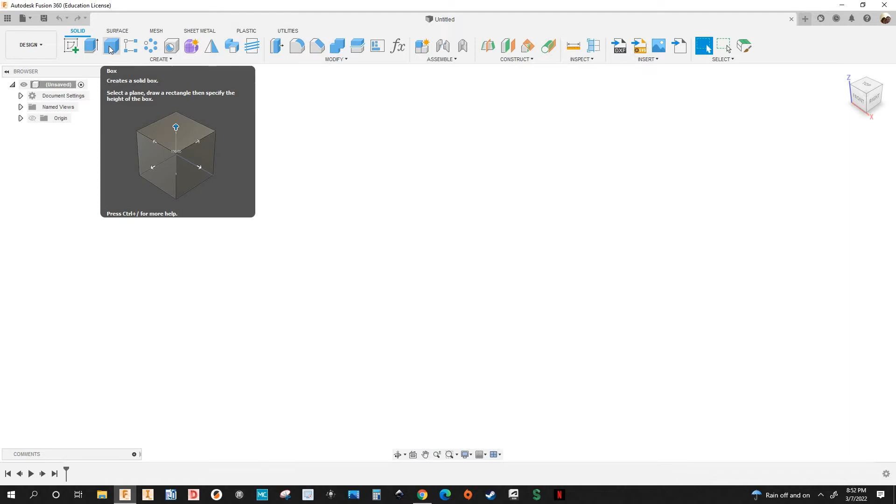I'm just gonna select the box up here. But before that, let me change the units from inches to millimeters.

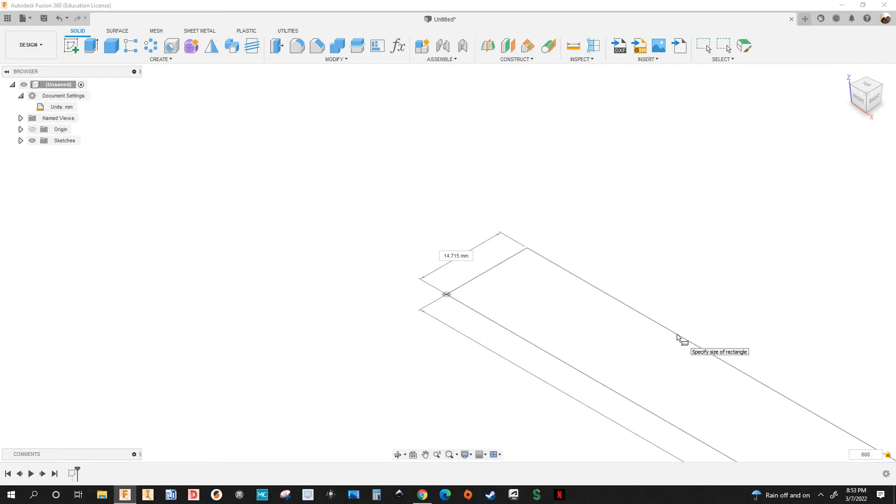Now I'm gonna select this box icon here, and I'm gonna select this bottom plane. I'm gonna snap it right there. My size of the part is gonna be 600 millimeters by 250 millimeters, and I'm gonna hit enter. My thickness is gonna be 50 millimeters, and the operation is gonna be new component. I'm gonna click OK. Here's the size of the stock or the size of the panel.

Next, I'm gonna create 3 pockets: two on the outside, one in the middle. I'm also gonna create a groove right here in the center, on this face.

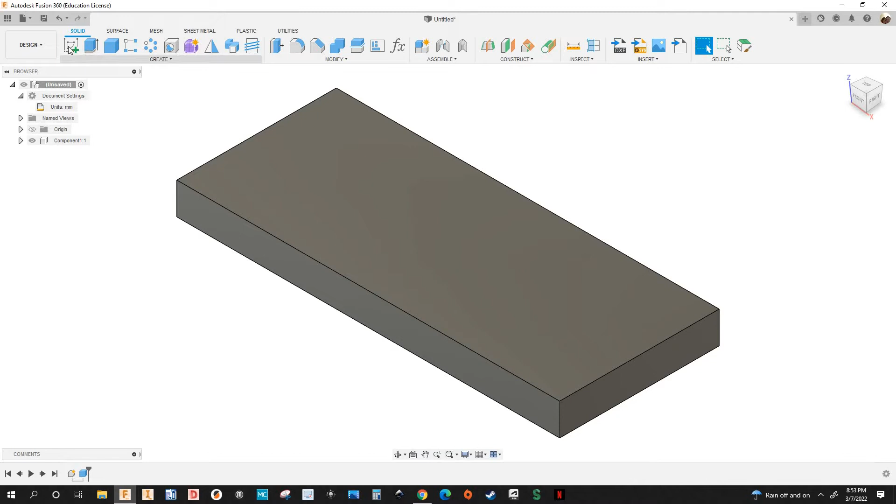So I'm gonna select create a new sketch, go up here, and select this face. Then I'm gonna select center rectangle right up here, and I'm gonna place it right there. Next, I'm gonna place this rectangle in the middle.

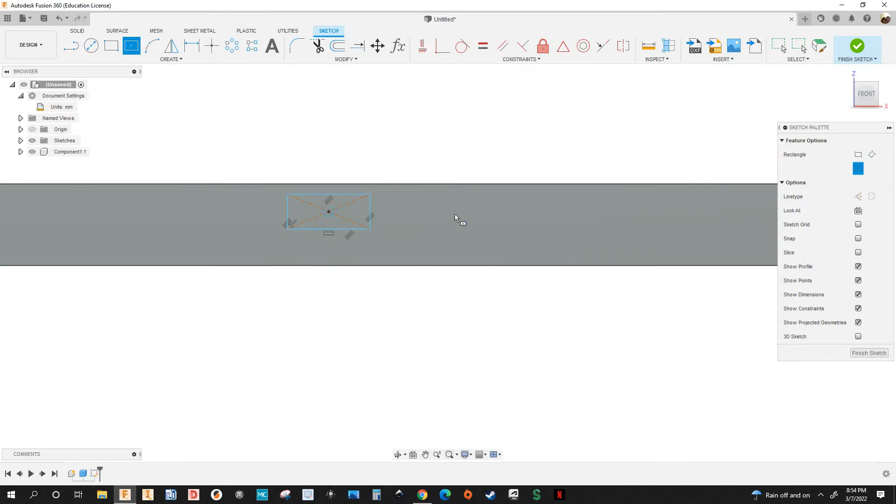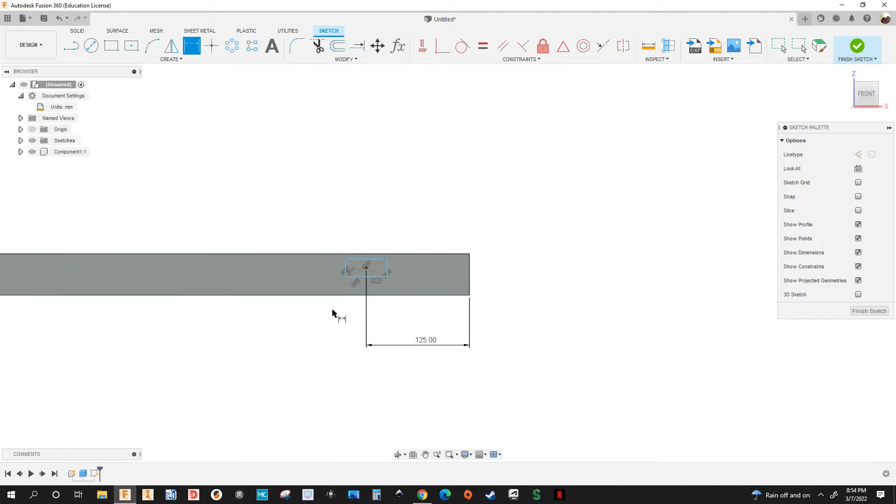I'm gonna go up here, sketch dimension, or I can hit D on my keyboard. I'm gonna select this point and this point there. I'm gonna type 250 divided by 2 because that's the depth of the part. Oh, sorry, the length of the part is 600. So I'm gonna type 600 divided by 2.

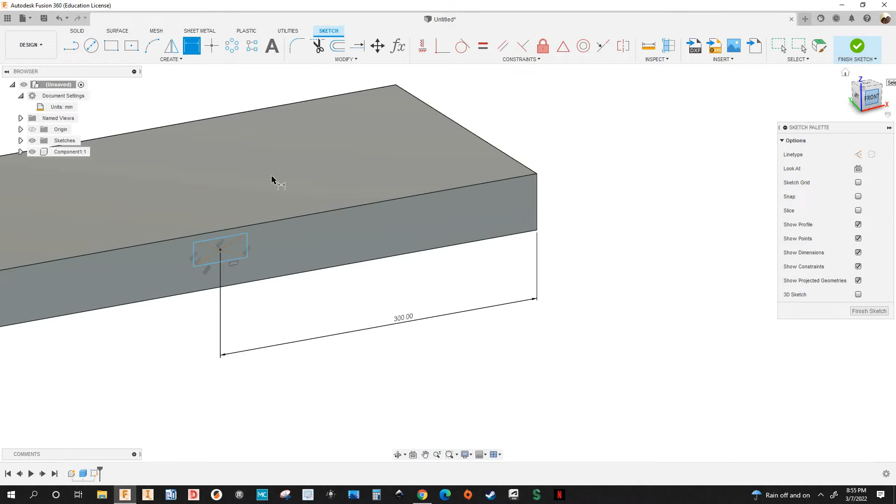That's the width of the part. Let me put it on front view. Next, I'm gonna select this point there with this point here, bring it out, and I'm gonna type 50 divided by 2. Hit enter. Now that rectangle is in the center, or the pocket.

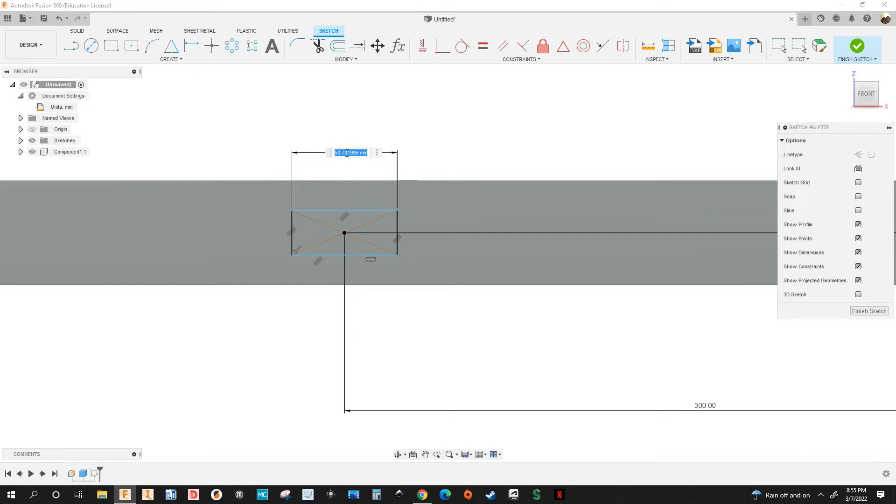So the size of this pocket is gonna be 70 millimeters by - select this line there by - let's make this 25. Hit enter. That's my first pocket right there, that rectangle.

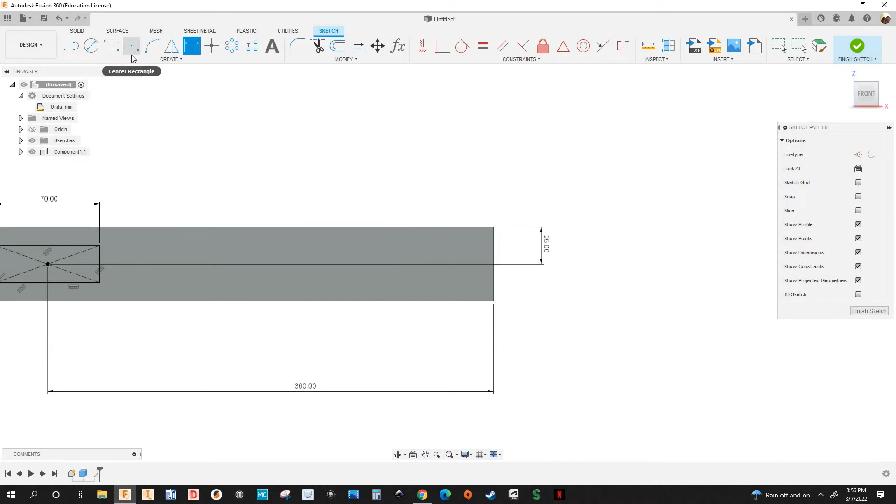Okay, so the next rectangle is going to be right here on the right side, or the next pocket. I'm going to go up here where it says center rectangle, place it right there, hit D for dimension, select that point there and this point here, and select this dimension there, that's D7. I'm going to hit enter. Right there is right in the center.

It's gonna be the same size as this one right here. So I'm gonna select this line there, bring it down, sorry, and I'm gonna select this dimension there, which is 70 millimeters, and that is D8. I'm gonna hit enter, and I'm gonna select this line there, and select this dimension, 25 millimeters, which is D9. I'm gonna hit enter.

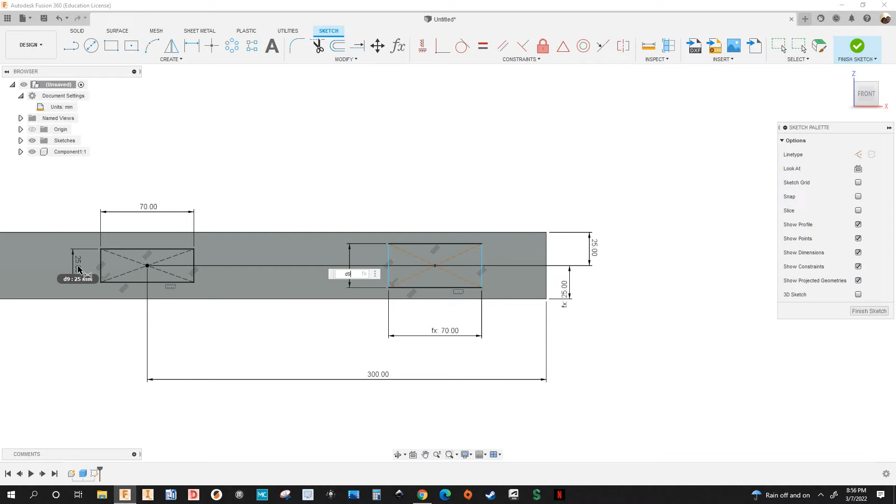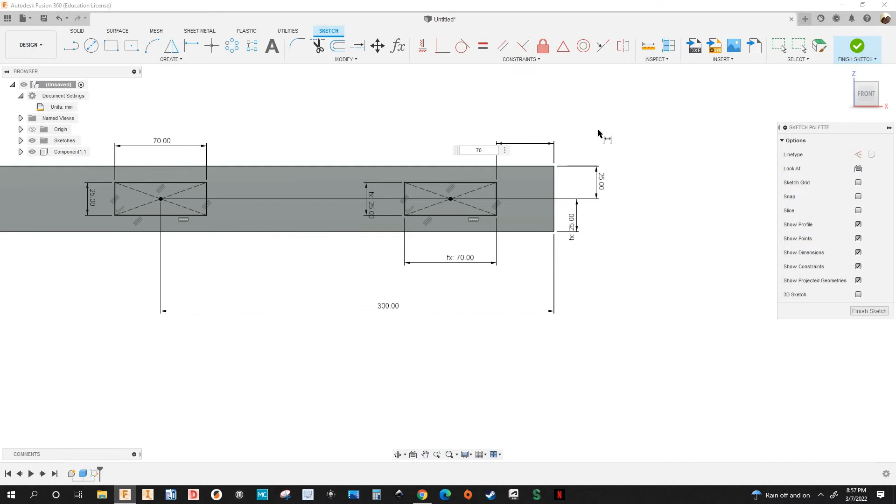And I need a distance right here from this edge of the pocket to the edge of the part right here. So let's make this - I'm gonna select that point and this point there - let's make this 70 millimeters. Hit enter.

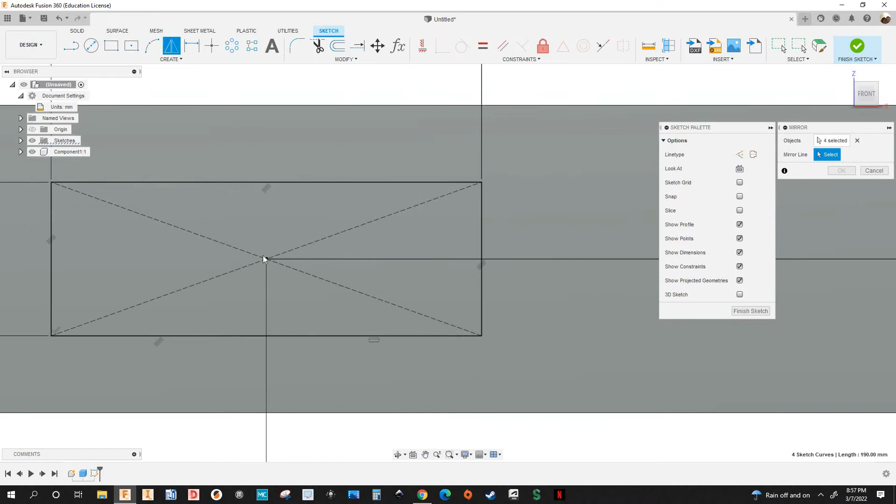Now I'm gonna mirror this rectangle to the other side. I'm gonna go up here where it says mirror, click on that guy, and I'm gonna select this line, this line, this line, this line. Those are the objects. And I'm gonna click on mirror line, and mirror line is gonna be - I thought I could select this midpoint there. So I'm gonna cancel.

I'm gonna create a line right here in the center. So I'm gonna hit L for line on my keyboard, or I can go up here, select that line, and I'll select that midpoint, or I can bring it down there and select that triangle right here. See the triangle as the midpoint.

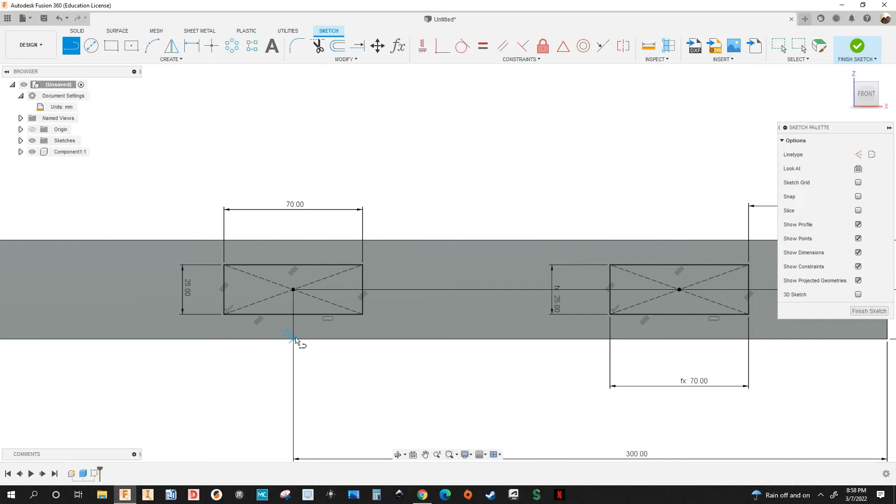Okay, but I'm not going to be able to see it because of this dimension, so I'm going to go up here, snap it right there, bring it up, hit enter. Now I'm going to mirror the rectangle to the other side.

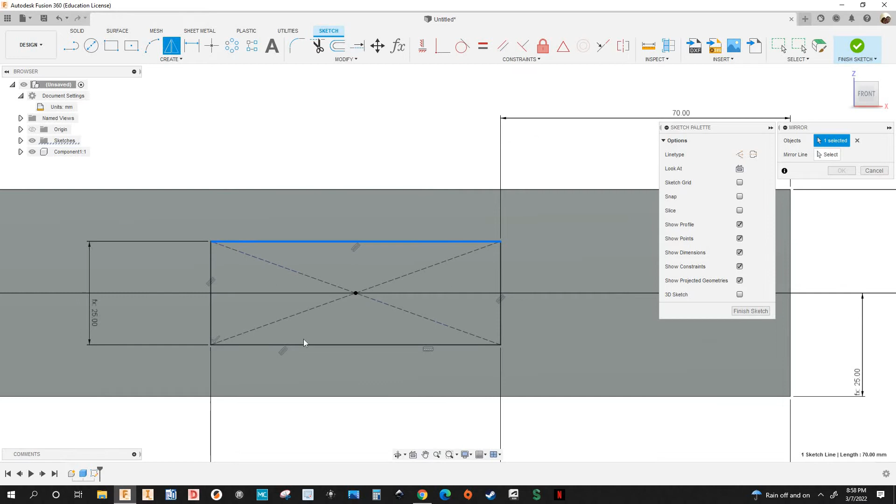So I'm going to go up here where it says mirror. I'm going to select this line, this line, this line, and this line. You can also window select all these 4 lines if you want, okay?

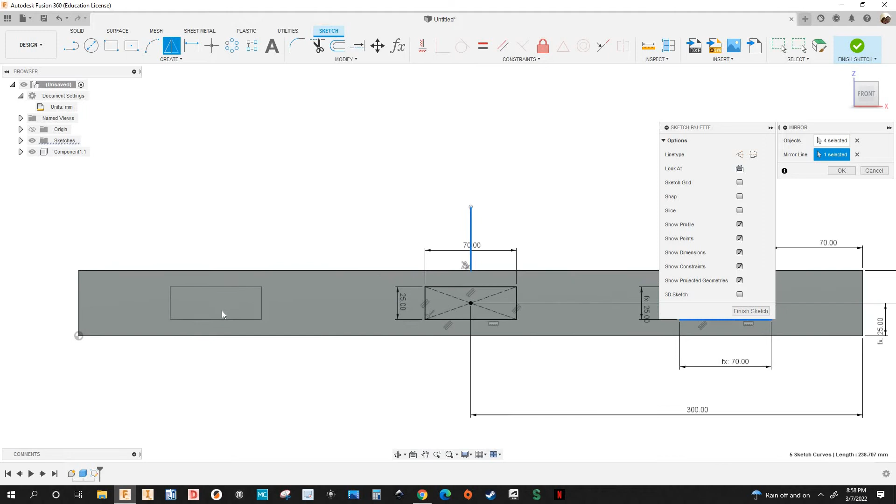Next, I'm going to click on where it says mirror line. Click on that, and I'm going to select this line right here, and this is that rectangle, okay? And I'm going to click OK.

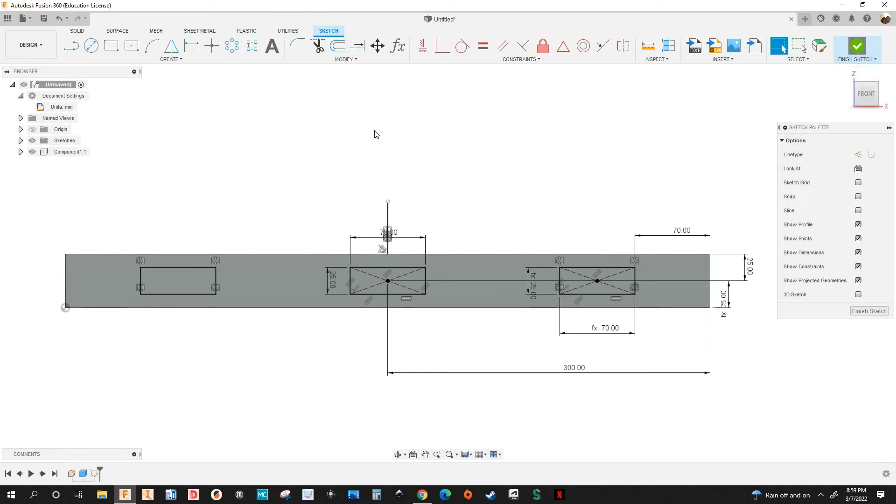All right, so I just created all these three pockets right here. Next, I'm going to extrude these pockets, okay? So I'm going to hit E on my keyboard, or I can finish sketch and select this extrude icon right there.

Now I'll select this profile, and this profile, and I'm going to type minus 12 millimeters. Okay, and rotate the part. Okay, now I got 3 pockets created.

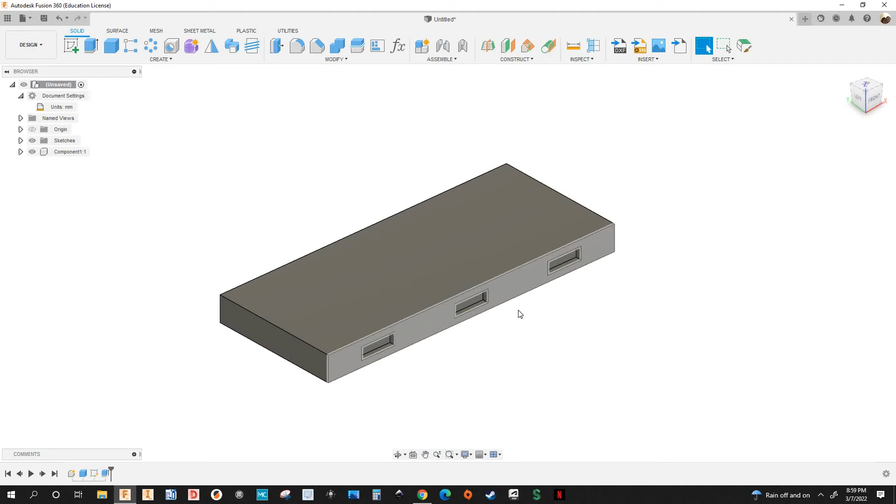Now I'm going to rotate the part this way, and I'm going to create a sketch right here on this face. So I'm going to go up here where it says create sketch, and we're going to select this face.

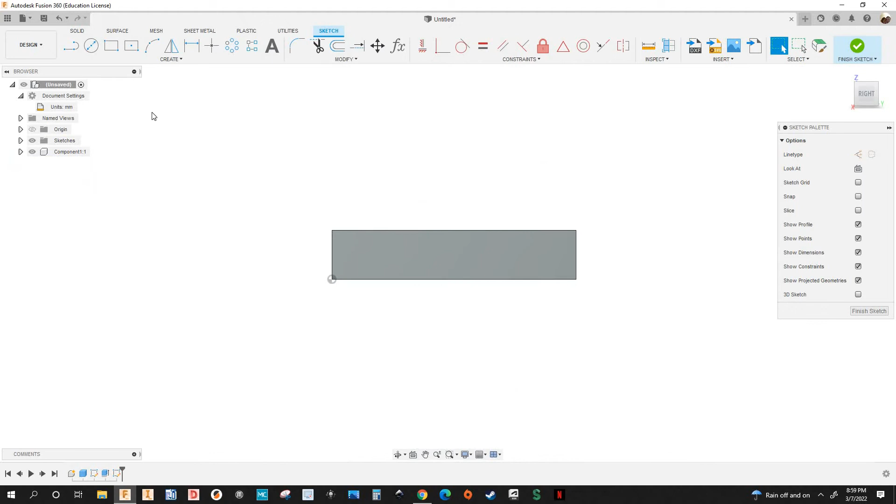I'm going to select a center rectangle up here. I'll place it right there, and I'm going to dimension this rectangle. So I'm going to hit D on my keyboard. Select this line. I'm going to make this 13 millimeters wide,

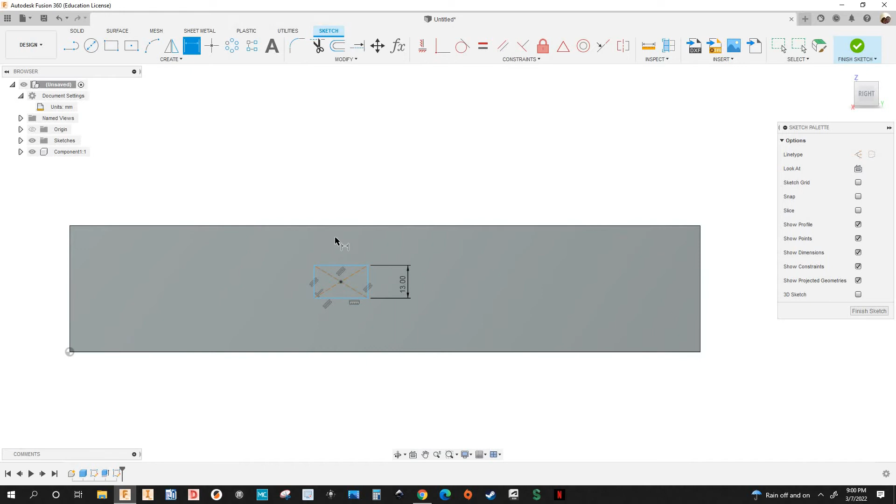and select that line. I'm going to make this 250 millimeters long.

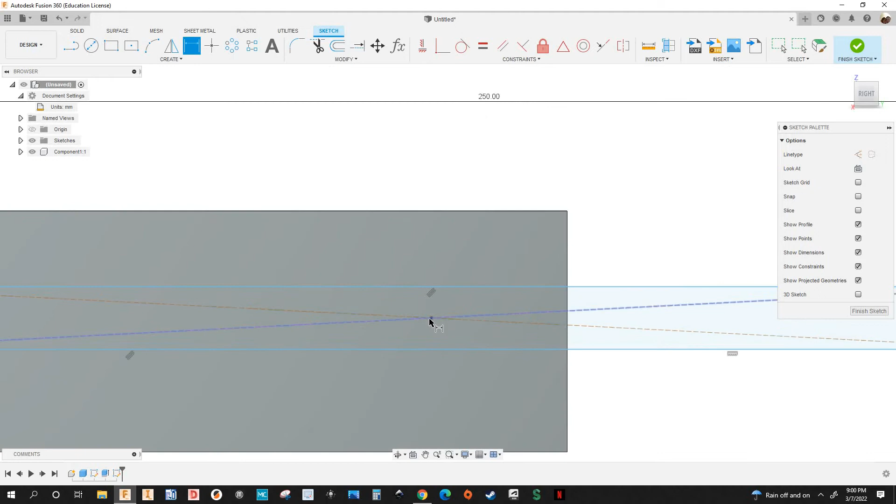Now I'm going to have to place this rectangle in the center right here. Now I'm going to select this midpoint and this point right there. Bring it down. I'm going to type 250 divided by 2.

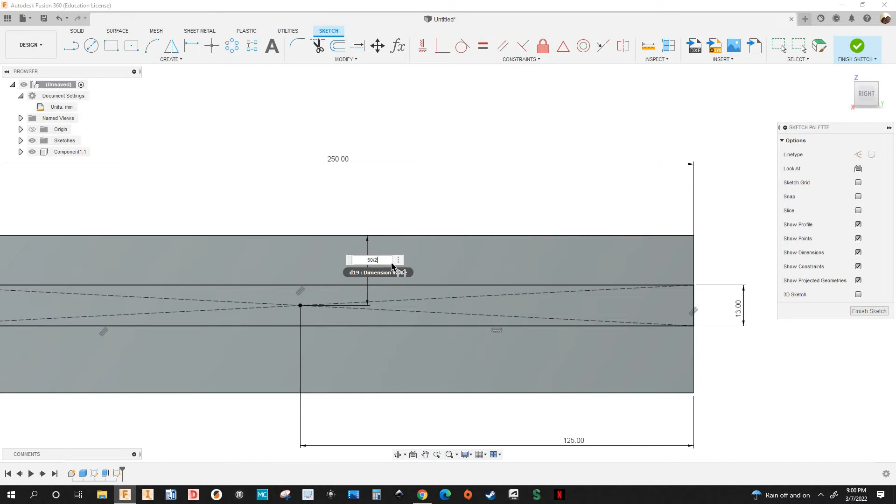Hit enter. Okay. I'm going to select this point again, the midpoint, and this line here. I'm going to type 50 divided by 2. Now that rectangle is right in the center.

Next, I'm going to extrude this profile to create that groove. So I'm going to hit E on my keyboard to extrude. Select that profile. I'm going to type minus 12 millimeters, and the operation is going to be cut, right?

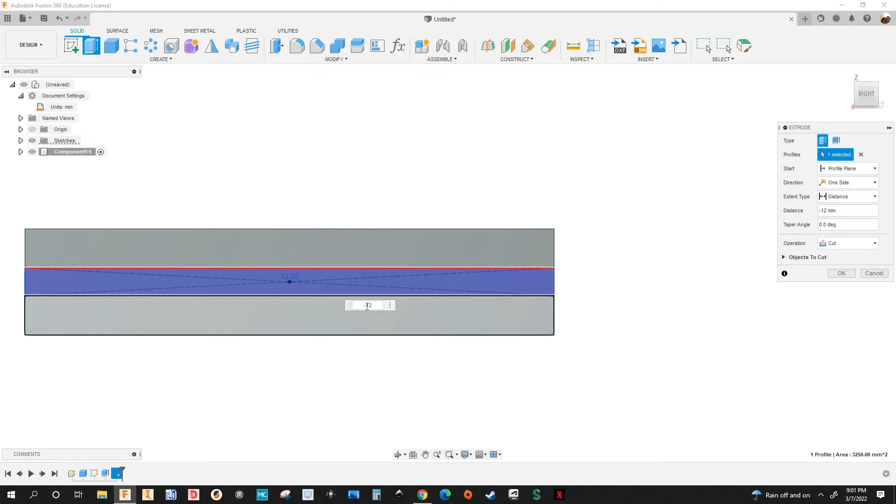Because I'm entering the minus. I'm going to hit enter. Rotate the model. And there's that groove. Okay.

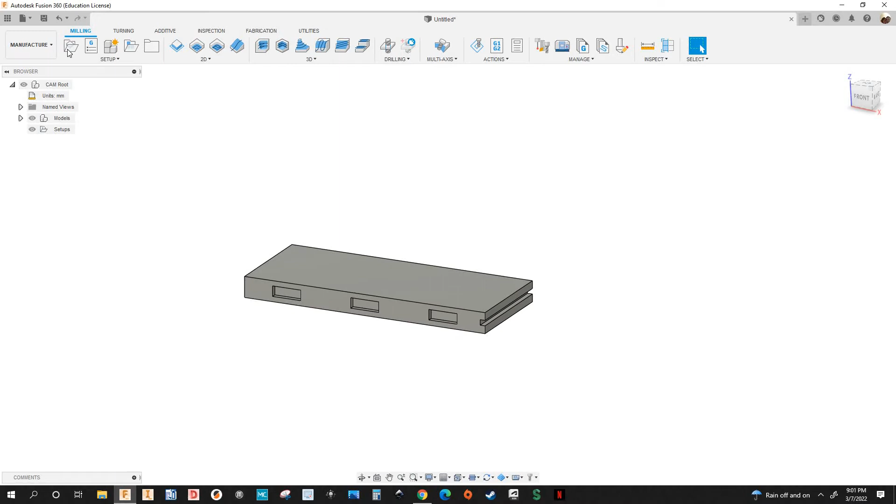Next, I'm going to go to manufacture workspace to program this part. And right here, in this workspace, I'm going to go up here where it says create new setup, and my WCS is going to be right there.

Okay, yours might be different. Might be on the top face. Might be on one of these points here. Okay, my machine is going to be right there. All right.

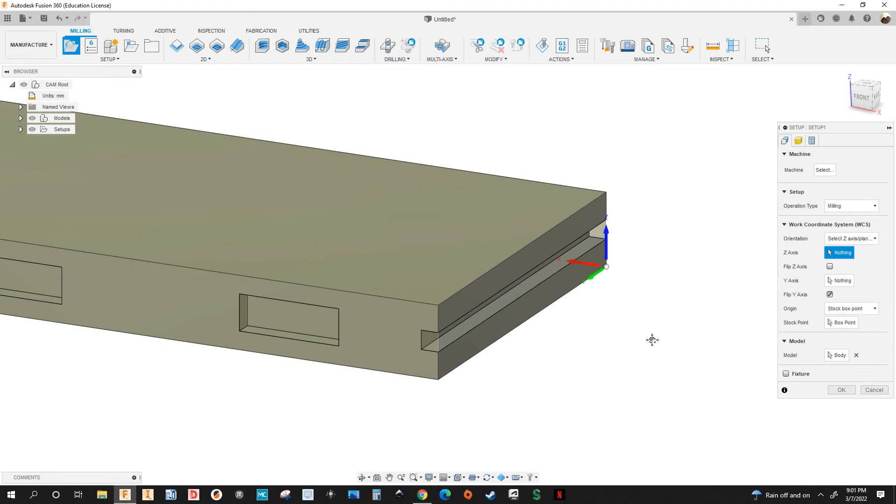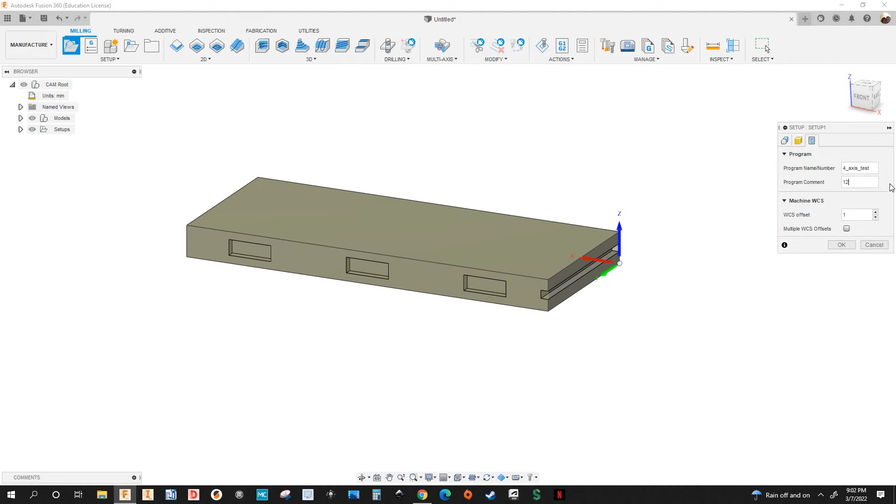Next, stock tab. I'm not adding any stock. Post process tab. I'm going to name the program 4 underscore axis underscore test, and program comment is I'm going to type 12 millimeters 3 flute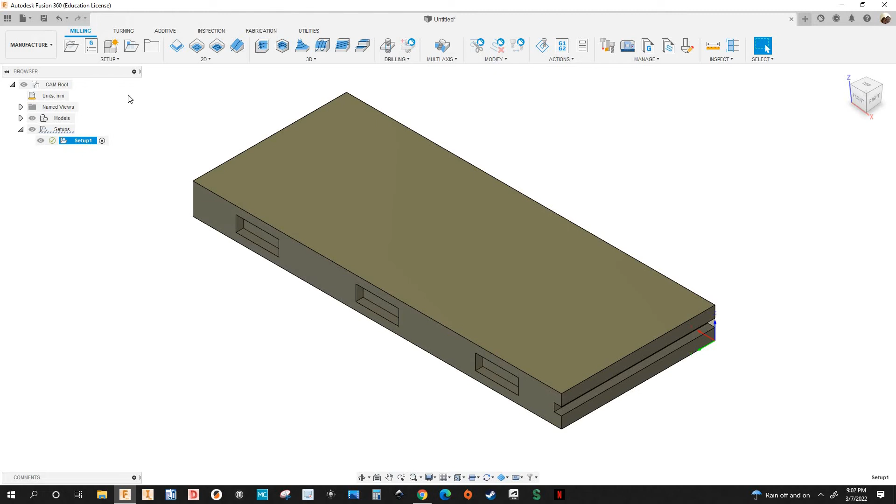Next, I'm going to use a 2D pocket. Okay, I'm going to go up here where it says 2D pocket. This guy, not 2D adaptive clearing. See, the icon's a little different. See them? So I'm going to use this guy right there, 2D pocket.

And where it says tool, I'm going to select the tool. I'm going to go down to that Weeke CNC wood, and I'm going to get that 12 millimeter compression bit. This guy right here. I'm going to select that end mill,

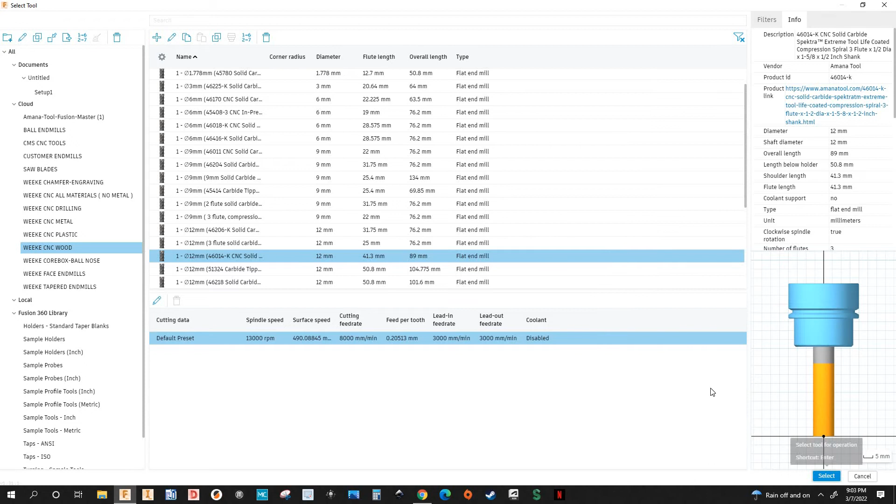and I'm not changing the feeds and speeds. Okay, so next tab is going to be geometry, and this is where I'm going to do a tool orientation to make this 4-axis. Okay, so I'm going to check right here where it says tool orientation,

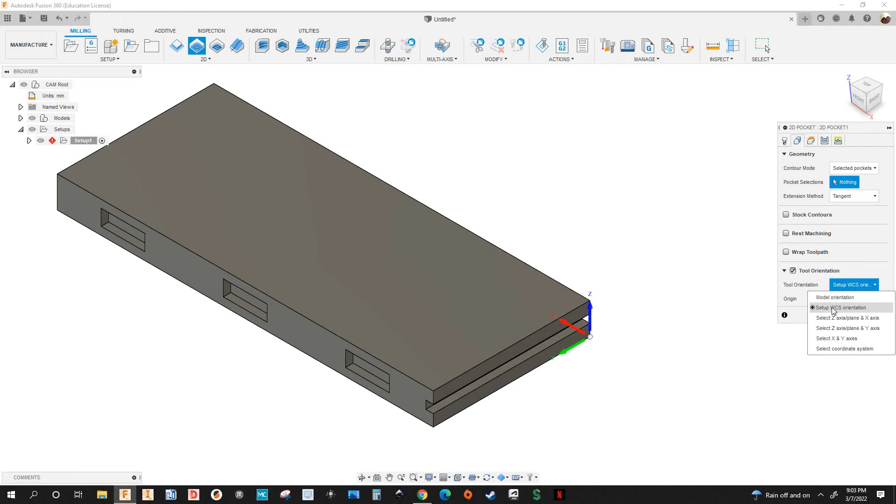and I'm going to click on tool orientation, and I'm going to go down. I'm going to go down to where it says select Z-axis, plane, and X-axis. Select that. So the Z-axis is going to be this face. So I'm going to click on this face.

Okay, I gotta flip it. Actually, that looks good. I don't have to flip the arrow on the Z-axis. Okay, so that looks good. The X-axis is gonna be this edge there.

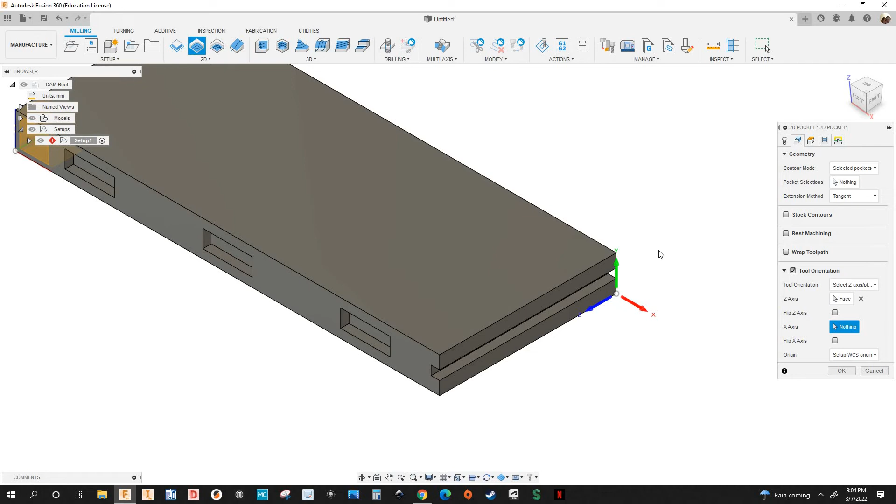Okay, I'm gonna click on the X-axis to flip it. Oops, sorry about that. Let's go back to select Z-axis plane and axis. And X-axis, sorry about that. Okay, I'll just leave it like that. This should do it. Next tab is gonna be the heights.

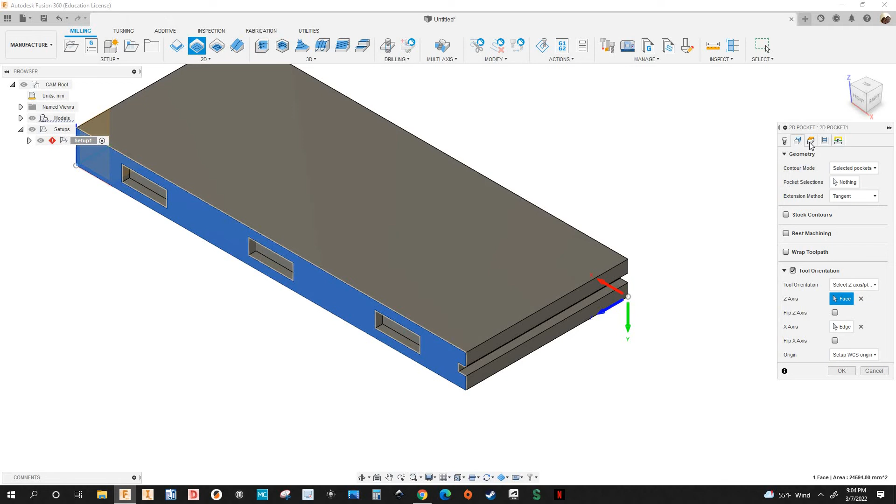The heights. Just leave it the way it is under the passes tab. Multiple depths, I'm gonna uncheck that. And the maximum step over, let's make this 10 millimeters. I'm gonna change the tolerance to 0.2 millimeters - this is the one that works best for my machine. I'm gonna change the smoothing tolerance as well, it's gonna be the same, 0.2 millimeters, and smoothing deviation is gonna be the same, 0.2 millimeters.

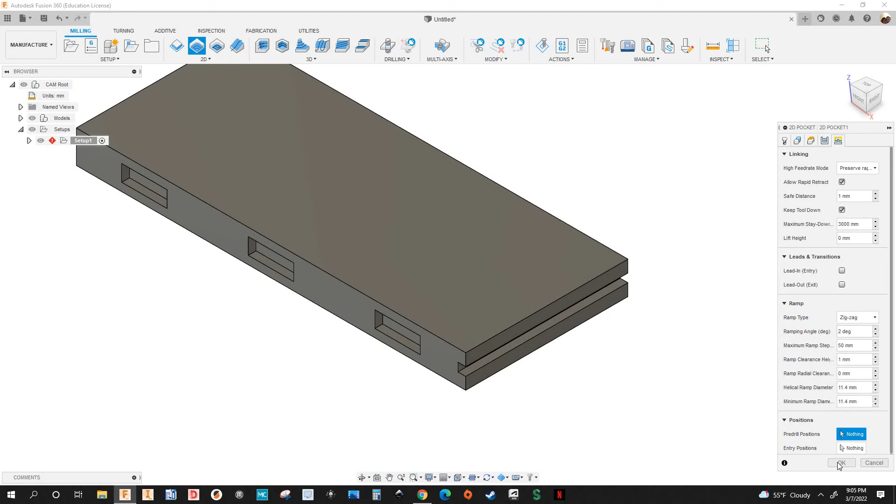On the linking tab, I have a ramp type which is a zigzag. I'll just leave it like that. I'll click OK, see what we get. Oops, no pocket selected, sorry about that guys.

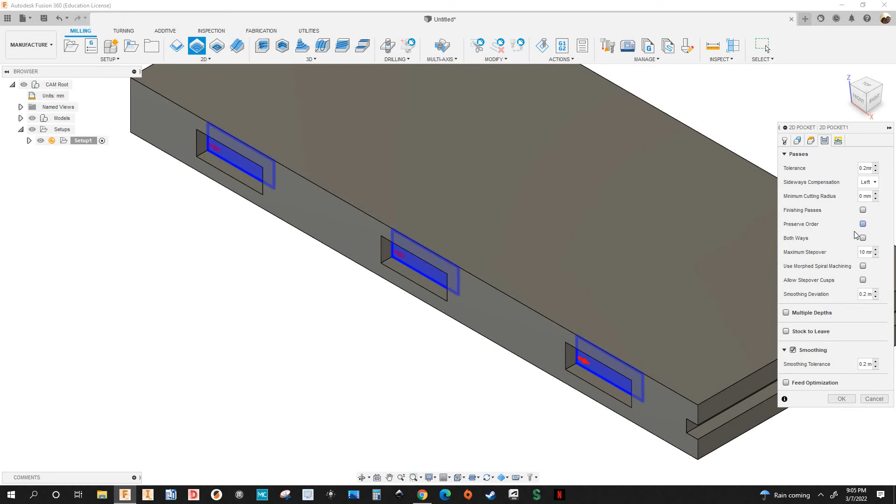So it took me back to the geometry tab. I'm gonna select this pocket there, this one, and this one. Okay, let's go back to passes, and I'm gonna check preserve order. Check that. So the machine's gonna start here, then it's gonna continue to machine the other pockets. I'm gonna click OK.

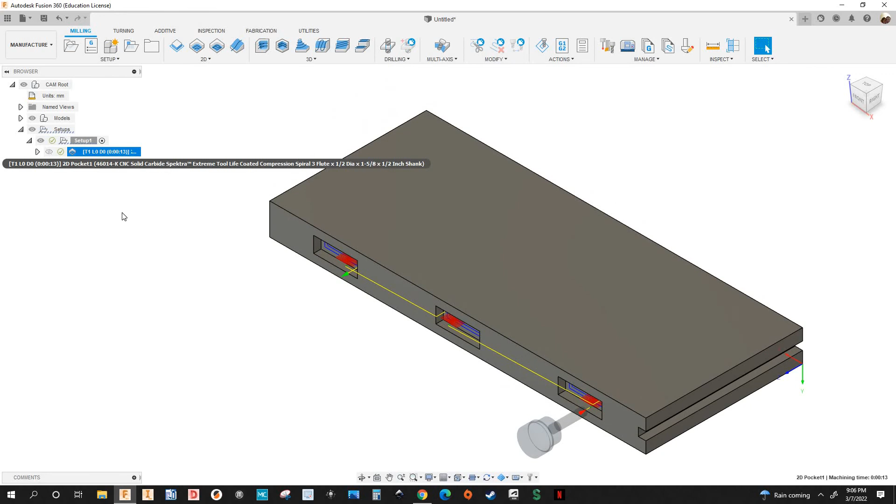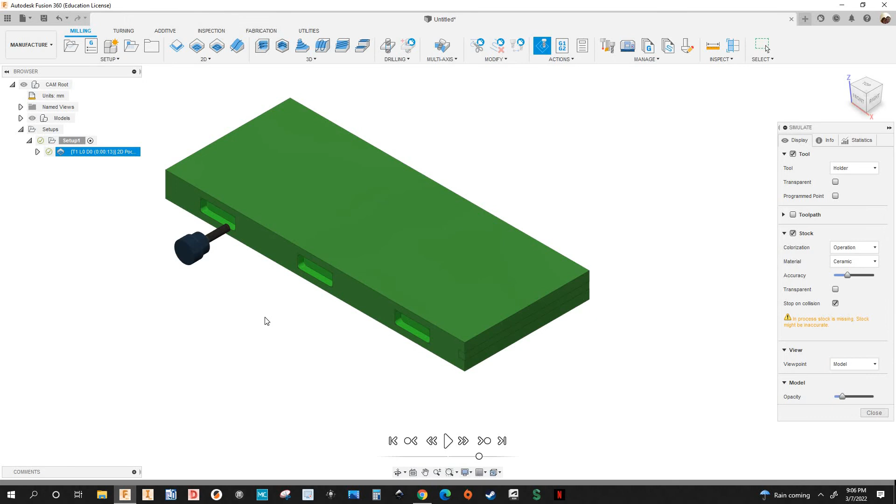Okay, there you have it. All right, let's simulate this toolpath. I'm gonna right click, simulate. I'm gonna turn off the toolpath right here, just uncheck that. Slow it down a bit. Okay, so that's my first toolpath. I'm gonna close this simulation.

Now I'm gonna machine this groove here. I'm gonna use the same operation, the 2D pocket, same mill. So I'm gonna right click on it and duplicate it. Select duplicate. And I'm gonna select the 2D pocket. I'm gonna right click, edit.

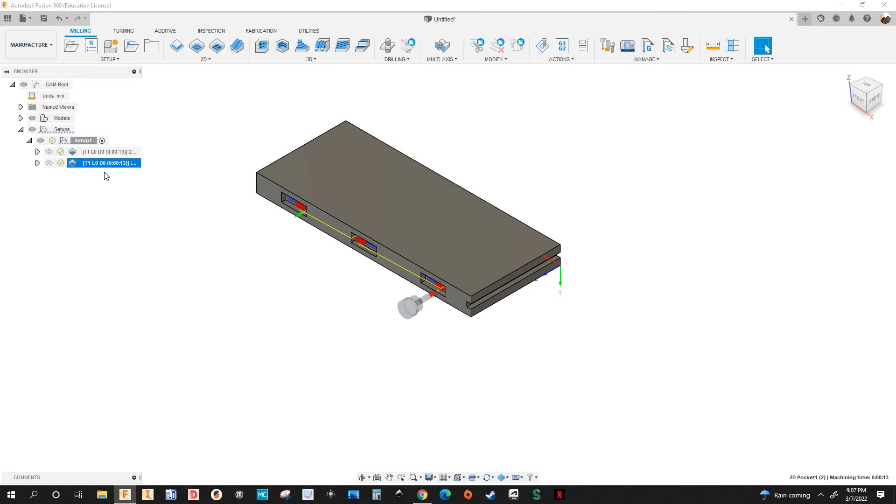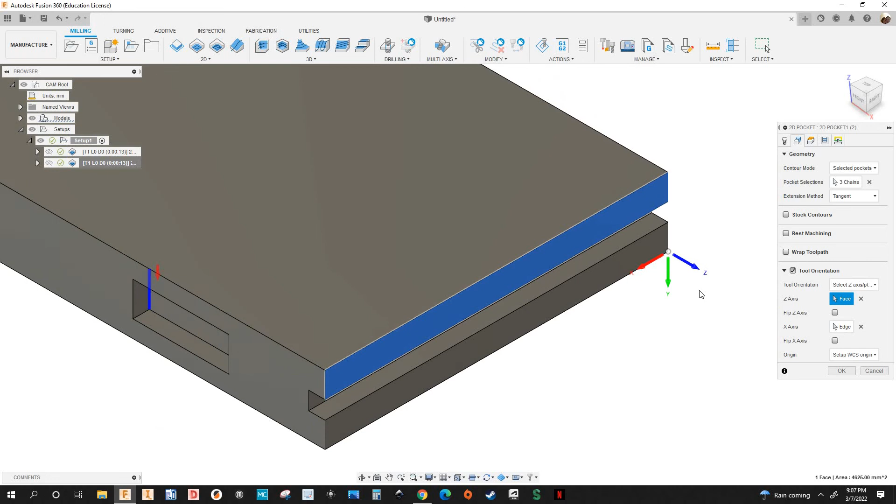I'm gonna change the tool orientation, right? I want the Z axis to be facing this way, to be on this face right here. Okay, so under tool orientation, I'm gonna click on the X on the Z axis, and I'm gonna select this face there, and that's it. I'm gonna click OK - before that, I gotta select the pockets. Okay, keep forgetting about that. I'm gonna click on the X, and I'm gonna select this face here. I'm gonna click OK.

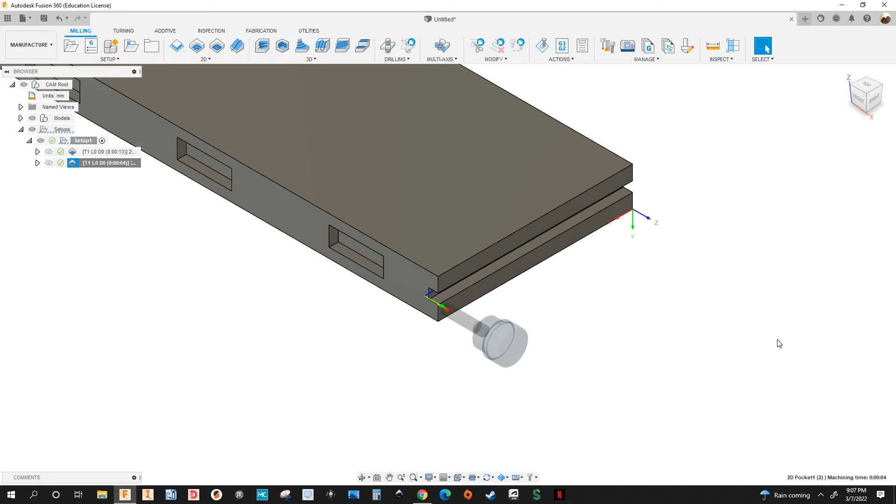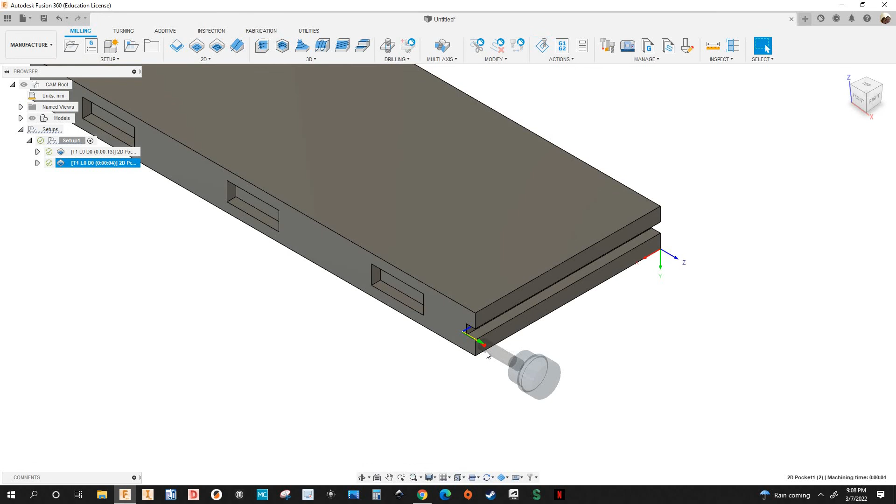I'm gonna right click, simulate. There it is. Okay, you can also use 2D pocket if you want, or actually 2D contour if you want. All right, right now I'm using 2D pocket. Okay, rotating the parts, you can see the tool path better.

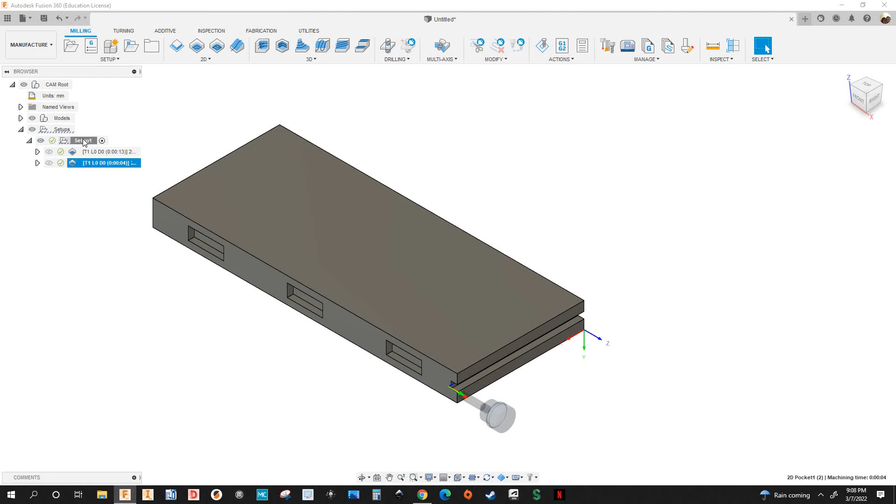Okay, so just program this part that has 4-axis machining. Next, I'm gonna post process this program. So I'm gonna right click, post process, and I'm gonna post it. I already have a program named 4-axis test. I'm gonna overwrite it, I'm gonna click yes.

I'm gonna open up woodWOP, and I'm gonna go to File, Open, for that folder. Okay, right there, so I'm gonna open it up in woodWOP. Okay, so I'm getting universal macros.

So let me go back to Fusion 360 and right click on the setup one, post process, and see where it says output NC code in ISO format. Okay, I'm gonna have to uncheck that, and that's it. I'm gonna post it. Click on post. Yes, I want to overwrite it.

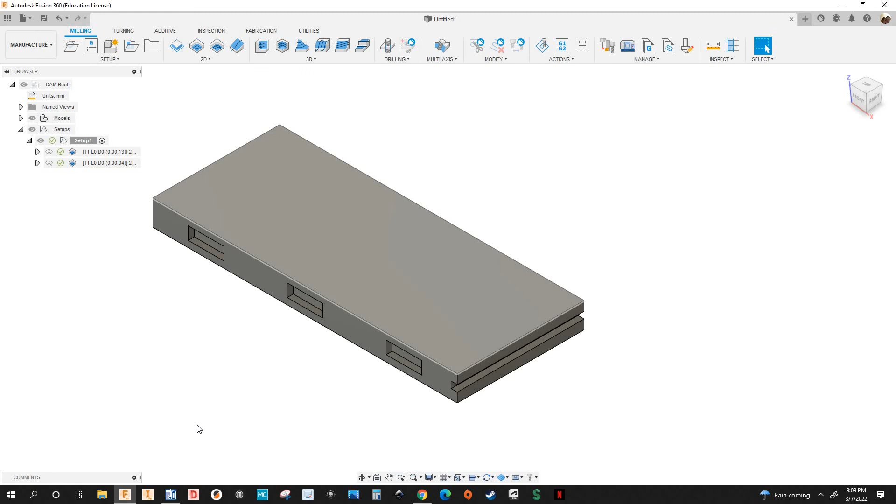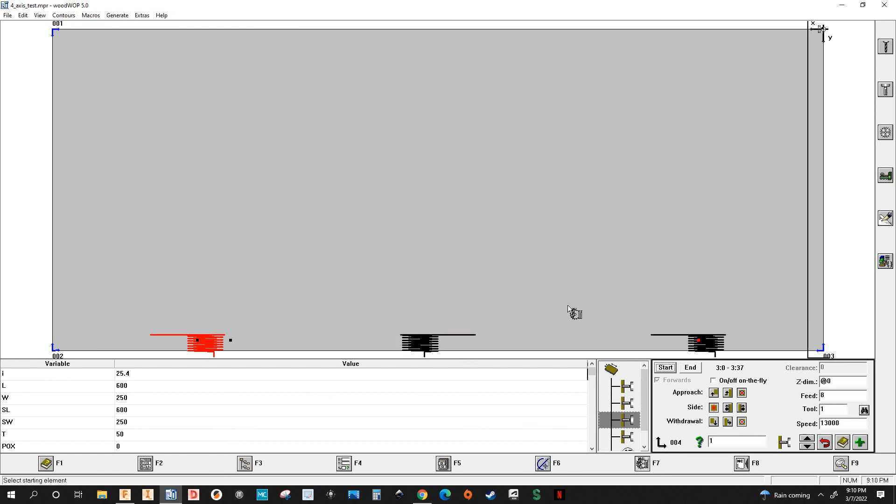I'm gonna go back to woodWOP, File, Open, Program, click Open. Okay, and there you have it. All right, okay, that's one macro, that's the other macro - the center pocket. Okay, and there's a groove - this is the toolpath for that groove right here on the right side of the part.

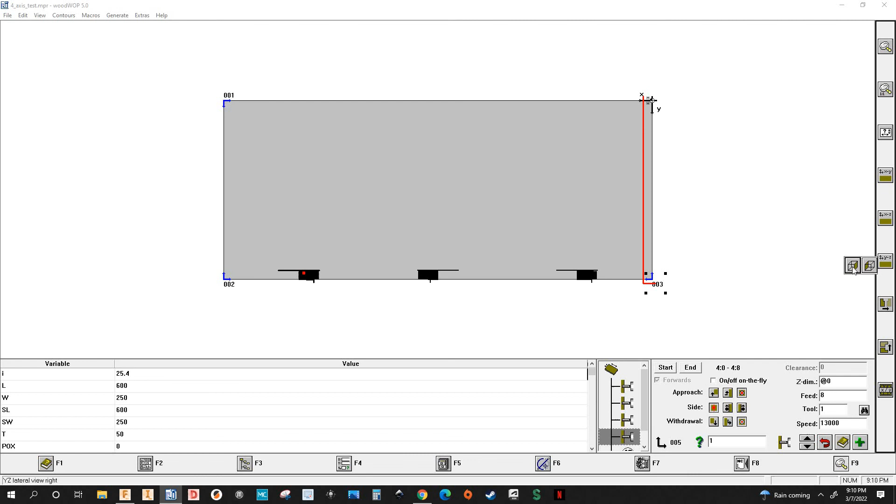So I'm gonna view this right here. So I'm gonna select the plane, I'm gonna change the plane. So I'm gonna select the X and Z plane. So I'm gonna go down here where it says F9, and it's gonna be XZ - be actually YZ. Select this plane right here. There's that groove right here.

Okay. Let's check the 3 pockets, so it's gonna be the XZ plane. Okay, now you see the 3 pockets. Okay, all right guys.

That's 4-axis programming using Fusion 360 for your Homag and Weeke CNC machine.